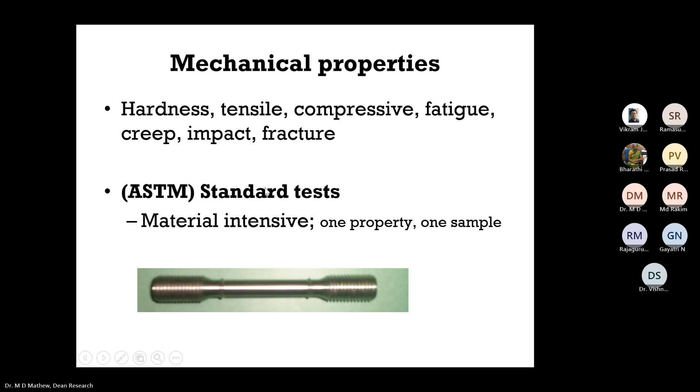But here I am going to discuss with you and share my knowledge on 3 innovative tests.

The special feature of this test is that these tests are material non-intensive. That means you don't need much material to do these tests. Or with a limited amount of material, you can generate a large amount of data.

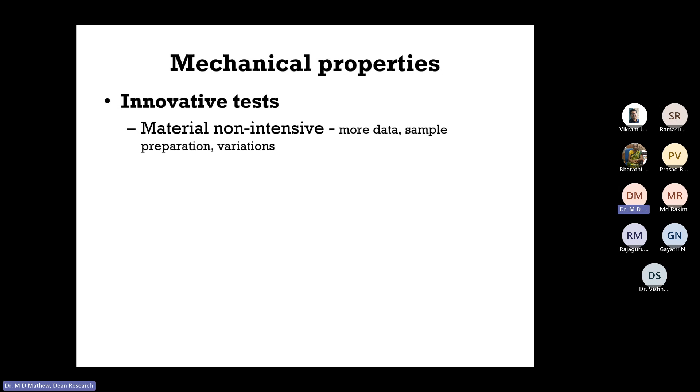Once you have only a limited amount of material, from one sample you can generate more data, as you will see going forward. That would mean a lot of sample preparation work can be avoided. Sample to sample variation in the data can be avoided. So there are many advantages for these innovative tests.

Which are these tests that I'm going to talk of? These are about ball indentation, from which you can evaluate the tensile properties, the fracture properties, and the hardness of the material. The other two are small punch creep and impression creep. As the names suggest, these are all about creep properties.

This becomes useful in the case of structural integrity evaluation, which means you can scoop a small portion of the material without compromising the integrity of the component. You can scoop out a small piece, and that can be used for these kinds of tests. And of course, the scooped portion, you can do some weld overlay and repair it.

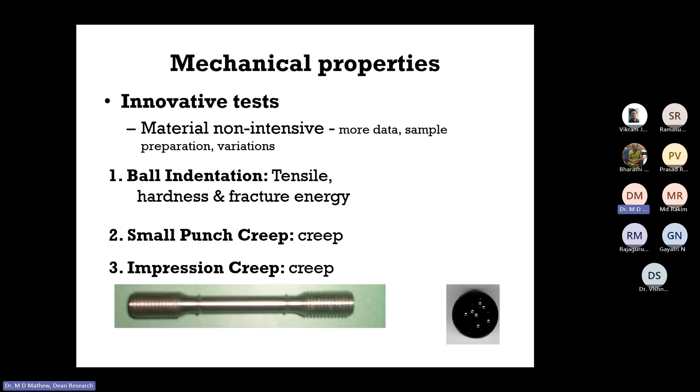The results that I'm going to present, as I mentioned, at IGCAR, there exists a state-of-the-art laboratory for carrying out evaluation of materials using these innovative methods of ball indentation, impression creep, and small punch creep.

I was fortunate to have been able to work with some of the pioneers in this field at North Carolina State University on ball indentation, at Kagoshima University on small punch creep, and also take inspiration from pioneers like JCM Li in impression creep, and late Professor D.H. Sastry from IISc also on impression creep.

So what are the advantages of these innovative tests? As I said, this is material non-intensive. You need only a small amount of material. See, in a conventional creep or tensile or fatigue test, you need a lot of material.

You take a small piece of plate itself and cut it into small mini strips, and then blocks or blanks, and then machine them into samples. Each may be 100 mm long or 10 mm diameter, etc. So that's really material intensive testing. On the other hand, these tests are material non-intensive, so you need really a small amount of material, and that is the big positive about these tests.

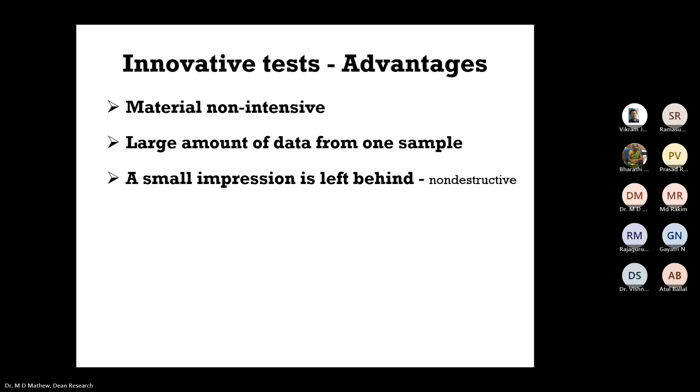So large amount of data from one sample. And these tests, except in one case, will leave only a small impression in the material. And that is why I call it non-destructive. It will leave only a small impression and maybe some compressive stress. So that qualifies it as a kind of non-destructive test.

Therefore, it becomes suitable for structural integrity assessment, assessing the remaining life of materials, and you can use it for materials development. Suppose you are developing a new alloy where you will be making a large number of laboratory heats with minor variations in composition, and you need to do a rapid screening. It comes very handy because these tests are short. You can do this test very quickly, so a large number of these heats can be characterized for screening purposes.

And another big advantage of these mechanisms or methods is that you can characterize the creep properties of different microstructural zones of weld joints. We all know that a weld joint's integrity is ultimately decided by the properties of either the weld metal, the base metal, or the heat affected zone, and the weld is always considered to be a weak link.

So it is difficult to determine the properties of each of these zones. Either you make a big weld pad and then prepare weld metal samples, or from the parent material you prepare base metal samples. But it is very difficult. Or you make a sample which will contain weld metal, heat affected zone, as well as base metal. But if you want to evaluate the properties of the heat affected zone itself, we know that in the case of alloys and steels, for example, the heat affected zone is very complex, with different kinds of microstructure in the heat affected zone itself, and each microstructure can have a different property.

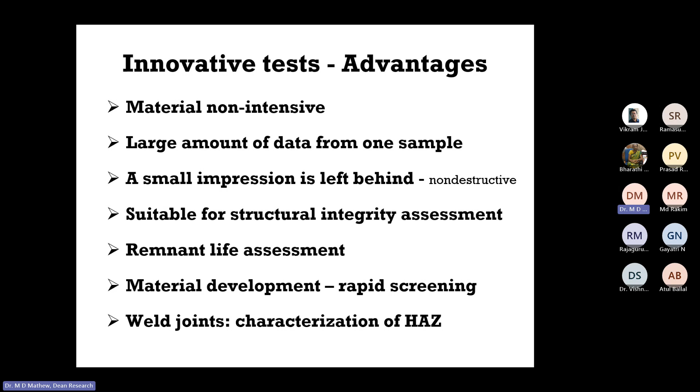If you want to characterize the properties of the heat affected zone, there is no other method, whereas this method allows you to do that. But it is not all rosy. There are many limitations. The first and foremost is about the mode of loading. Most mechanical tests we do are tensile tests, loading is tensile, but in these innovative tests, the loading turns out to be either compressive or bending mode.

Since these tests are all quick tests, testing time is short. But when it comes to alloys which can undergo microstructural changes over a period of time when exposed to high temperature, we'll be able to capture that effect in a standard test, where, for example, a creep test may go for hundreds and thousands of hours. Since these tests are short duration, we may not be able to capture the changes in the property of the material that occur as a result of microstructural changes.

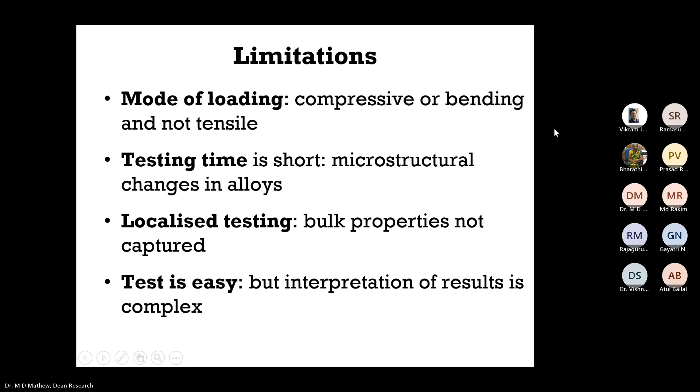It's a localized testing, so if you're looking at average bulk properties of the material, it is not represented. The test itself is not difficult, but interpretation of the result is pretty complex, and that is where still a lot of questions remain.

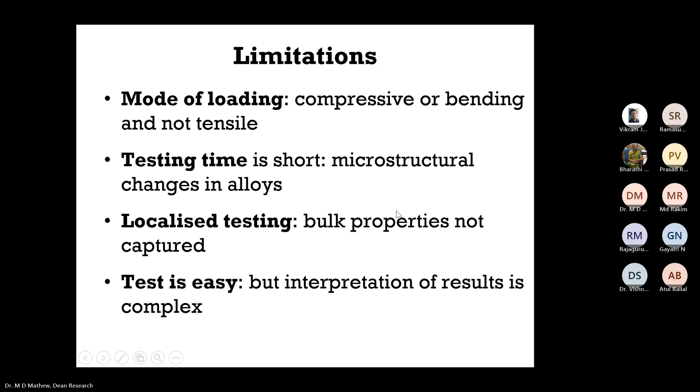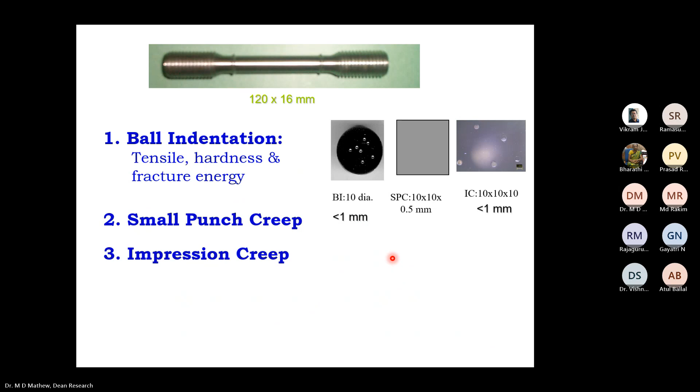Now coming to a little bit of detail about the ball indentation test. The test is basically a strain controlled multiple indentation. What you basically do is you have a tungsten carbide steel ball, and the ball is pushed into the material under strain control conditions. You don't push the ball in one step.

You do it in multiple steps, and in every step, you will initially define what is the total depth of penetration that you want to do. That is divided into some 6 or 7 equal amounts, and then in those steps you are penetrating the indenter into the material. Every time you are not penetrating the material fully inside, it's only partly inside, so there's a partial unloading that happens. So it is called a strain controlled multiple indentation test involving partial unloading.

As the indenter penetrates the material, you measure the load and also the depth of penetration, so you have two sets of data. Your raw data is the load as well as the depth of penetration. If you are doing 7 or 9 steps, you will generate a large amount of data continuously measuring load and depth of penetration from one experiment. Once you have this data, you can process it, apply elasticity and plasticity theories, along with certain semi-empirical relationships, and derive the tensile properties, hardness, as well as the fracture toughness of the material.

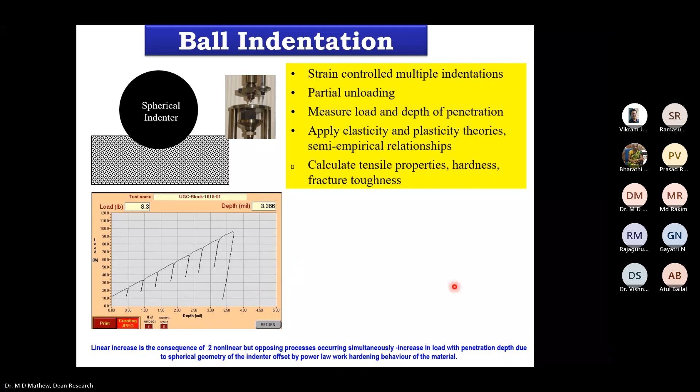So once you process the data, what do you get? You will get monotonic true stress, true strain curves. And the assumption is, in this case, that the true stress, true strain curve, which you have generated under compression mode, compression loading, is similar to the true stress, true strain curves in tension.

Another assumption in this processing of the data is that the indentation strain can be correlated with the strain in a uniaxial tensile test. And when you apply the ball, there is a pressure, and the mean ball pressure can be correlated with the stress in uniaxial tension.

And another important assumption is that the stress triaxiality and the deformation energy at the tip of the indenter is similar to what exists at the tip of a crack in a standard fracture mechanics test.

So you have here a ball, you are driving it into the material, you measure the depth of penetration, you measure the corresponding load, but this process is repeated multiple times, and you have the depth of penetration and load data. And from that, you are generating the stress strain curve.

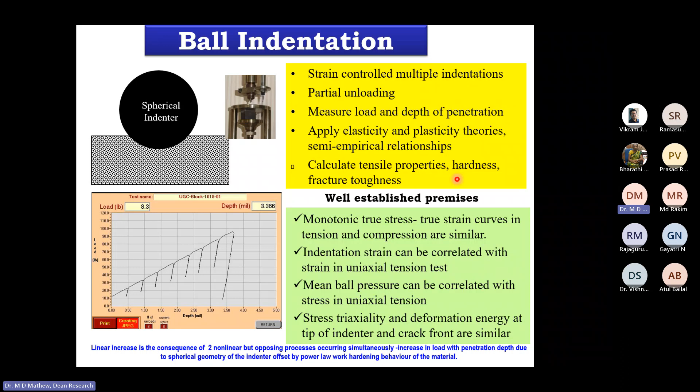Now, I should mention here that when a rigid spherical ball indenter is allowed to penetrate into a metal, then the material under the indenter will be in a triaxial state of stress. So the material immediately under the indenter will be subjected to both elastic and plastic deformation. So these stresses will force the material to deform elastically as well as plastically.

So this can result in an upward flow of the material, which we call pile-up of material, or it can also lead to downward flow of the material, which we call sink-in. And here there's a lot of scope for doing finite element analysis of the material behavior under the indenter in order to evaluate stress strain behavior, stress distribution, pile-up, sink-in calculations, etc., etc.

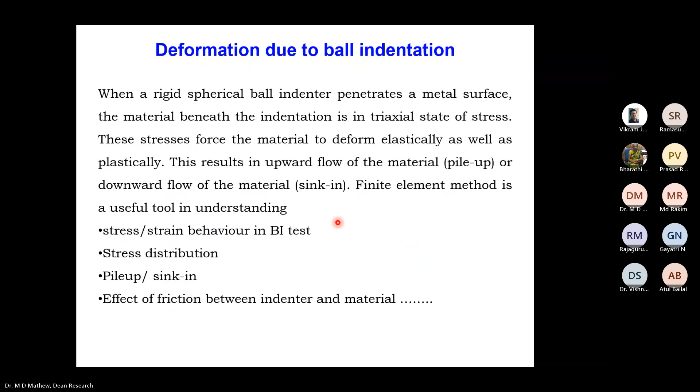And from that value, we can get a total diameter that will be consisting of elastic and plastic. So by applying certain Hertzian equations, we can convert this total diameter into plastic diameter. And once we have the plastic diameter value, then you can determine the epsilon P, the plastic strain in uniaxial tension, using this equation. Epsilon P is equal to 1/5 dP by capital D, where dP is the plastic diameter and capital D is the diameter of the indenter.

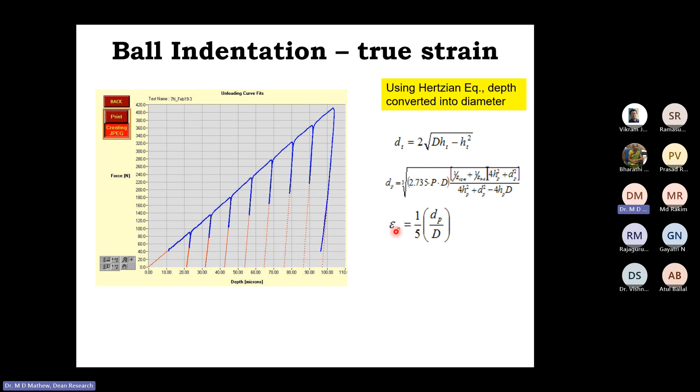So now you have got the true strain as you would derive from a tensile test. Now you need to get the true stress. So how do we get the true stress? So again, we have the load P, which is the load on the indenter. And then you can determine the mean ball pressure using an equation like this, 4P over pi dt squared.

And once you have the mean pressure, then you can evaluate the flow stress, uniaxial flow stress sigma, using this equation: sigma is equal to the mean ball pressure divided by a parameter delta. And the parameter delta is not having a fixed value. Its value will vary as the plastic zone size under the indenter evolves. So it's a bit of a complicated stuff. I'm not going into that.

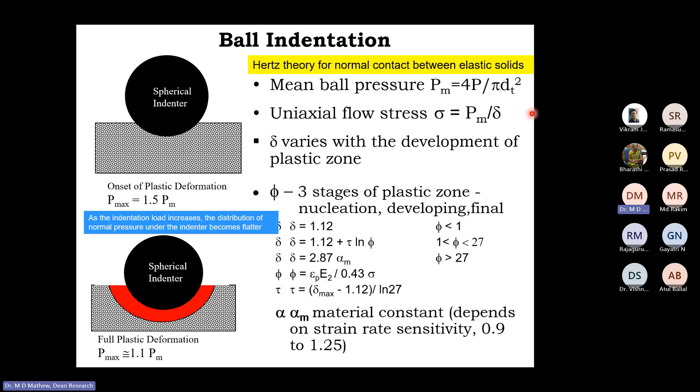So the point that you may notice is that we are now able to, from the load data, derive the uniaxial flow stress corresponding to each of the uniaxial flow strain values. So now that you have got the true stress and true strain values, you have many constitutive equations by which you can correlate the true stress, true strain values.

The Holloman equation is a very popular one. It says that the true stress sigma T is equal to a constant K into the true plastic strain to the power of N, which is the strain hardening exponent. So this is the curve that is generated, the true stress, true strain curve that is generated from the load versus depth data that we have seen earlier. So from that curve, now we are able to generate the true stress, true strain curve.

And by analyzing the true stress, true strain curve, we'll be able to get what is the UTS of the material through this relationship: UTS is equal to the strength coefficient K into epsilon U divided by E, whole to the power of N, where E is a constant for the material.

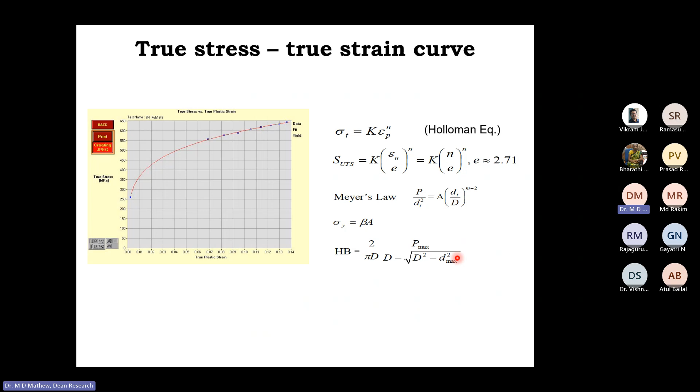Applying Meyer's law, you'll be able to determine the yield strength of the material using a relationship where yield strength is equal to beta into A. Again, the hardness can also be derived through an equation like this. I'm not going into the derivation of these equations, but from the load and depth combination data, we are able to get true stress, true strain data. From that, you can determine the yield stress, ultimate tensile strength, and hardness of the material.

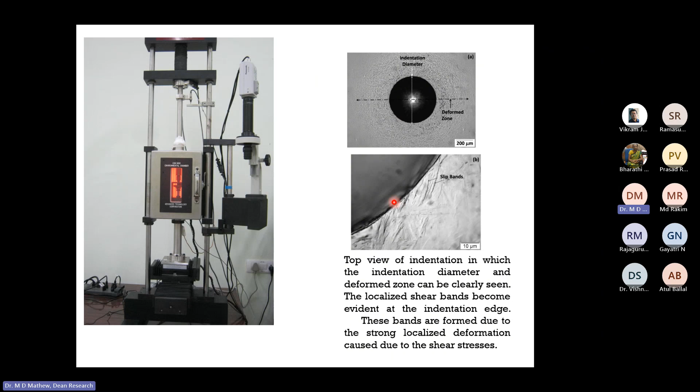So at IGCAR, as Dr. Reddy knows very well, we had a big research program on developing low carbon nitrogen alloy 316 stainless steel for certain important applications in fast reactors.

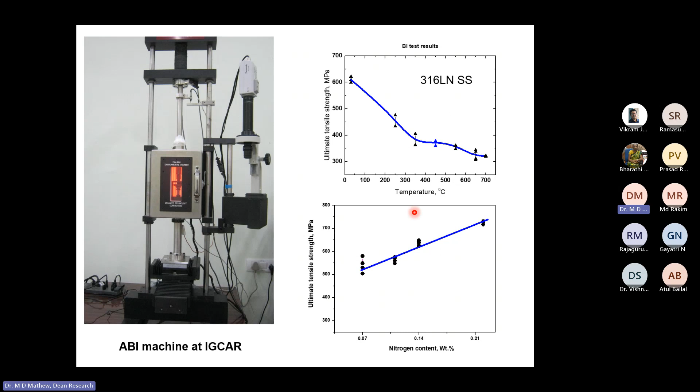Another advantage of this ball indentation test is that you can make an estimate of the fracture energy of the material without carrying out the conventional or standard CT tests. But here again, there are a few important assumptions. First is that the indentation generates a deformation field that is concentrated around the area of contact of the indenter with the sample.

The deforming volume of material is small, but it is surrounded by a large volume of non-deforming material. So as the indenter penetrates, the material immediately under the indenter undergoes deformation, elastic and plastic, but it is constrained by a larger volume of material which is not deforming. So a degree of constraint is exercised on the deforming material by the surrounding material.

This constraint is considered similar to the degree of constraint that exists at the crack tip. For a crack to progress, it depends on the kind of triaxiality at the crack tip as well as the kind of constraint it faces for propagation. So a kind of equivalence is conceived here - it is assumed that the stress triaxialities at the center of the contact area between the indenter and the material are similar to those at the crack tip. This has been proved by other researchers through finite element analysis.

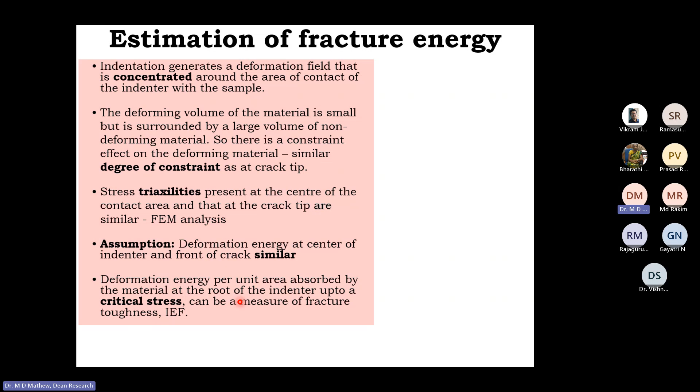So it is assumed that deformation energy at the center of the indenter and at the front of a crack are similar. If that is so, then the deformation energy per unit area absorbed by the material at the root of the ball indenter up to a critical stress can be a measure of fracture toughness of the material. That is called indentation energy to fracture, meaning if I were to continuously allow the indenter to penetrate the material to a depth that generates a stress equal to the fracture stress of the material, then the energy absorbed in that process can be correlated with the energy for fracture.

Fracture is assumed to occur when the maximum load equals the cleavage fracture stress. That means I'm allowing the indenter to keep penetrating under increasing load to a point where the equivalent stress becomes the fracture stress. Then I calculate the energy absorbed by the material under the indenter, given by this equation. That is the indentation energy to fracture.

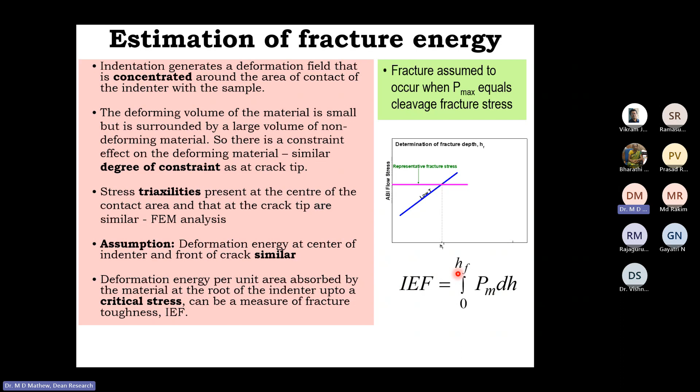The indentation energy to fracture can be correlated with, for example, the Charpy energy.

A lot of experiments were done on CF8. CF8 is a cast version of 304 stainless steel. Ball indentation tests were done from minus 150 degrees centigrade to plus 150 degrees centigrade on this material, and the indentation energy to fracture described earlier was evaluated.

This shows how IEF changes as a function of temperature. You find that as the temperature comes down, there's a kind of constant value. At higher temperature, IEF values tend to be constant, but as you decrease the temperature, it continuously decreases, and again it tends to reach a constant value at temperatures less than minus 100 degrees centigrade. So you would imagine this is a kind of ductile to brittle transition curve that you will generate in a conventional impact test.

And this curve represents the data obtained from standard impact tests, CVIT, using Charpy specimens, by carrying out tests roughly in the same temperature range. So you find that the shape of the curve is similar.

Yes, the values are not comparable. For example, here we have values in the order of 1000, 2000, etc., whereas here we have values in the tens. So values are not comparable, but the shape is comparable, which would mean even the DBTT temperature can be determined from this graph. So just by doing ball indentation tests on one sample of material, you will be able to get an estimate of the ductile to brittle transition temperature.

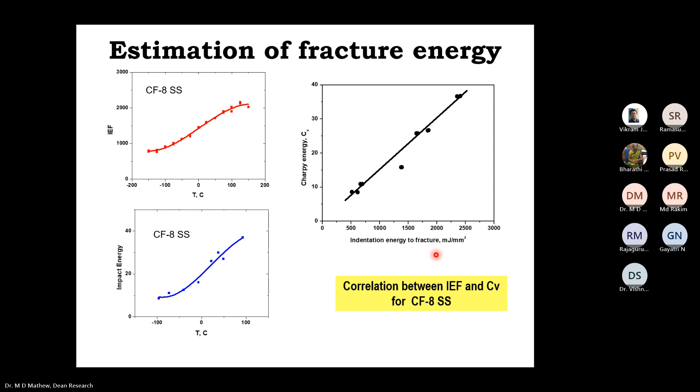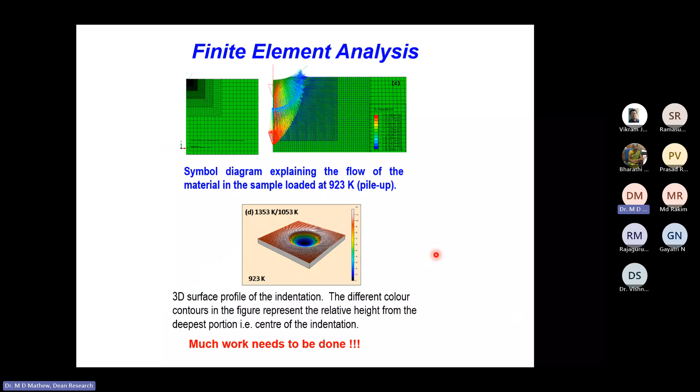We have done a lot of finite element analysis at IGCAR to support the assumptions that I have described earlier. Again, let me skip that.

So to summarize, ball indentation test is a very useful test in order to evaluate the tensile properties of the material, fracture energy, and the hardness of the material.

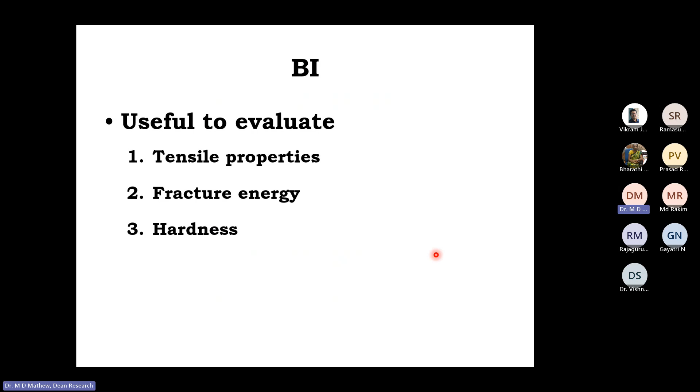Now I will come to impression creep. As the term itself tells us, the creep deformation is determined under compression loading. So what we do here is, at a constant load - creep means the deformation that happens at a constant load and constant temperature.

The deformation as a function of time is the creep curve. So in impression creep, again, the load is constant, temperature is constant, and under the action of this constant load, a flat-ended cylindrical indenter, typically about 1 millimeter diameter, is pushed into the material. When the material is pushed, the depth of penetration is measured as a function of time.

So although the temperature is constant and the load is constant, this indenter will continue to penetrate deeper and deeper into the material. And as it penetrates deeper, you measure the depth of penetration at fixed intervals of time.

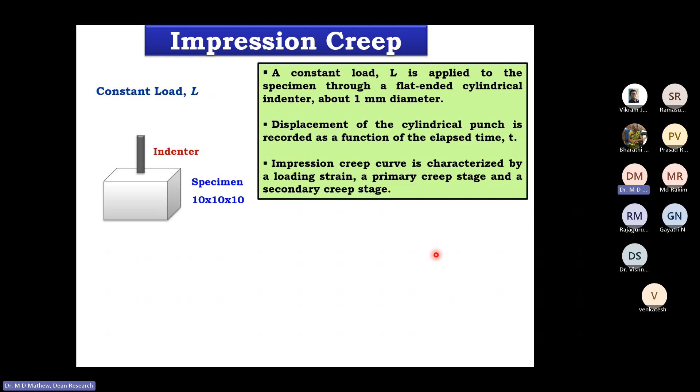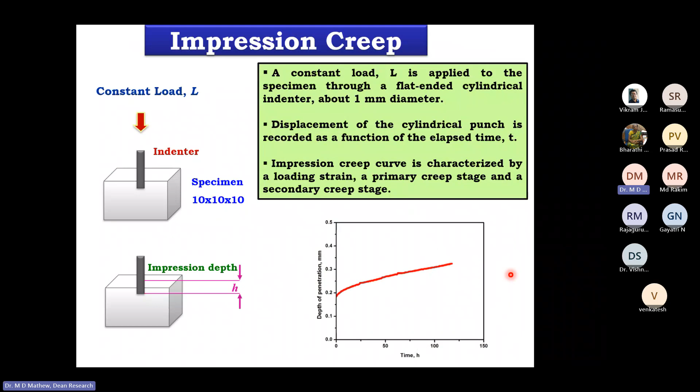So how do you analyze this creep curve and then generate important information that we need, which we would have got otherwise from a standard creep test? In this case, we have the load L.

First, you calculate the mean pressure under the punch. So you have a cylindrical punch of diameter small d, and you are applying a load, capital L. Under action of the load, you can calculate the mean pressure under the cylindrical punch: sigma m is equal to 4L divided by pi d squared, where L is the applied load, small d is the diameter of the cylindrical indenter, and sigma m is the mean pressure.

Now you can also determine the velocity of penetration, which is nothing but dH by dt. We have the depth of penetration data as a function of time, so dH by dt gives you the impression velocity. So now you have the mean pressure as well as the impression velocity.

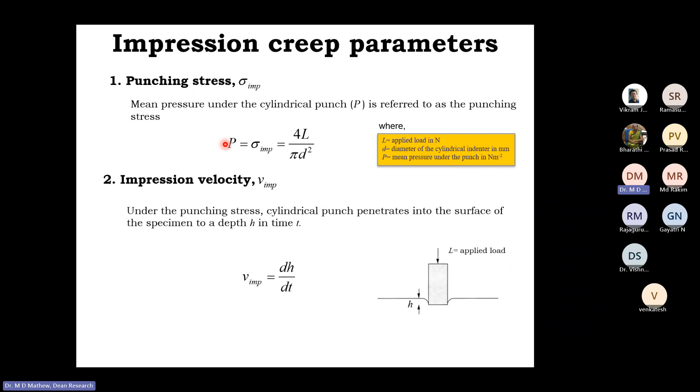Now, how do we convert it into strain and stress? The impression velocity can be related to the uniaxial stress sigma using a relationship: sigma uniaxial equals a constant alpha multiplied by the impression mean stress, sigma IMP. So sigma IMP, which we calculated as 4L by pi d squared, multiplied by alpha, gives you the equivalent uniaxial stress.

It turns out that alpha is around 0.3 for a large number of materials - alloys and metals, quite a bit of them - the value of alpha is about 0.3. It's a constant. You ask me why it is a constant, I have no idea, but that is the empirical evidence. So you have got the uniaxial stress.

Then you have the velocity of penetration - how can we convert it to the creep rate, strain rate? The strain rate is given by the impression velocity divided by beta into d, where beta is a constant and d is the diameter of the indenter. It turns out that beta is equal to 1 for a large number of materials.

So we have two constants: alpha, to convert the mean pressure into uniaxial stress, and beta, to convert the impression velocity to strain rate under uniaxial tension. So now we have both sigma and epsilon dot, and we can correlate stress and strain rate to generate other important relationships like Norton's law. This is how impression creep data is converted to equivalent strain rate and stress data.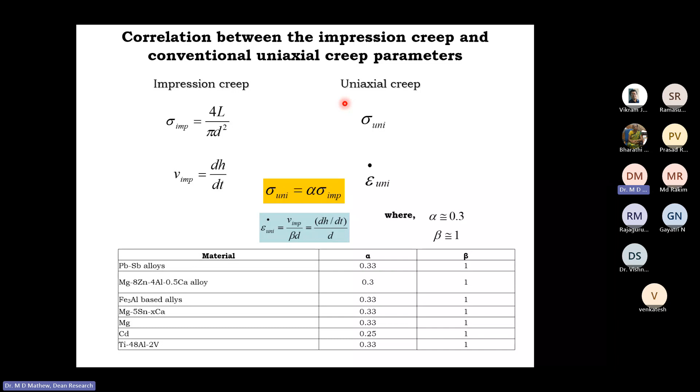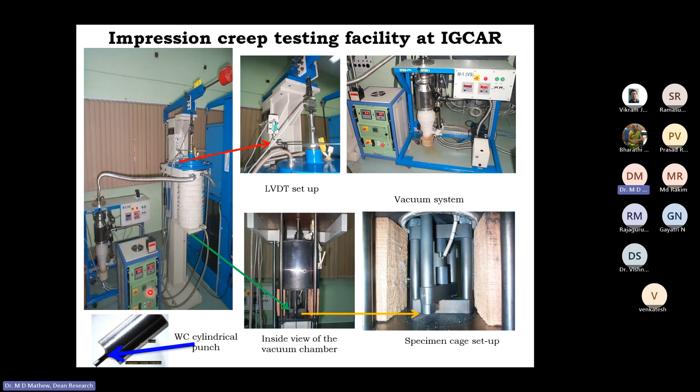This shows the experimental setup. It is not necessary to go into detail - this is the furnace, the sample is inside, and it is under vacuum. You have the loading mechanism, strain measuring, and depth of penetration mechanisms, etc.

This graph gives you the results of impression creep tests on 316LN stainless steel at 923 Kelvin at four different loads 472 to 760 megapascal. You see typical creep curves at all the stresses, and as expected, as you increase the stress, the creep curve moves up when you plot depth of penetration versus time.

The creep curves are characterized by a loading strain, a primary creep stage, and a secondary creep stage. As I mentioned, there will be no tertiary creep stage in impression creep because there is no necking and no fracture. With increasing load, the depth of penetration increases.

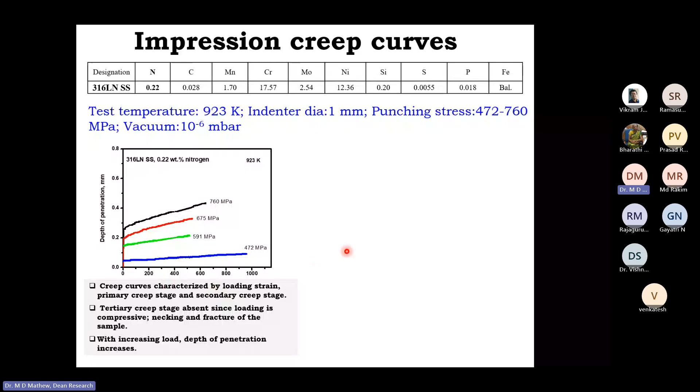From these creep curves, which plot depth of penetration versus time, you can generate the rate of penetration as a function of time. You find that the rate is very high initially and then becomes steady - this is the steady state deformation. So you get a very well-defined steady state in the impression creep test.

What you see here are the impressions left behind at the end of the impression creep test. One 10 by 10 by 10 sample block was used for carrying out, in this case, 5 impression creep tests.

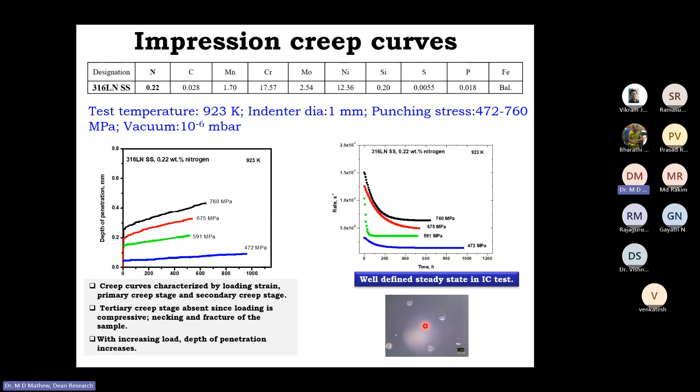This shows the correlation between steady state impression velocity and punching stress. On a log-log plot, you find a linear relationship, similar to the Norton law. The slope equals 7.7, which is the so-called stress exponent, and that is the number expected from standard uniaxial creep tests, a value of n in this range at this temperature.

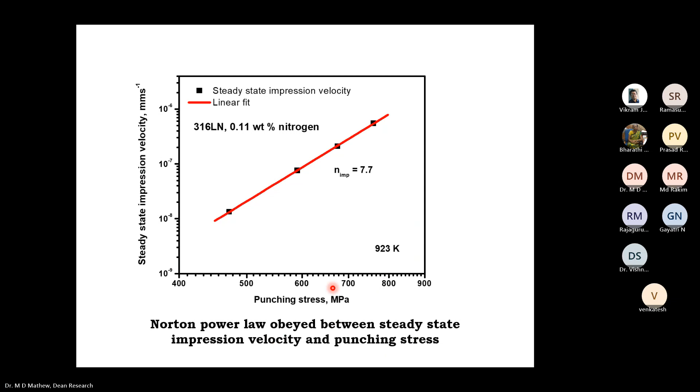So the Norton power law is obeyed between steady state impression velocity and the punching stress. The next question is how do we correlate the impression creep data with data from standard conventional creep tests. I already explained the conversion of mean pressure to uniaxial stress and impression velocity to strain rate, with constants alpha and beta.

So this is the correlation, a log-log plot of steady state creep rate versus stress. The red square data points represent the uniaxial creep test from standard test, and the circles represent the impression creep test. You find there's a very good correlation and the slope is the same.

So now you find you are able to convert the impression creep test data into the data you would have otherwise obtained from a standard creep test. But one thing missing in an impression creep test is you don't have any idea about the fracture life of the material, which is a very important property in creep test. So how do we do that?

There are certain methods. One is using the very well-known Monkman-Grant relationship, a very well-established relationship between steady state creep rate and rupture life for a large number of materials. So once you have the steady state creep data, using the Monkman-Grant relationship, you can derive the rupture life data.

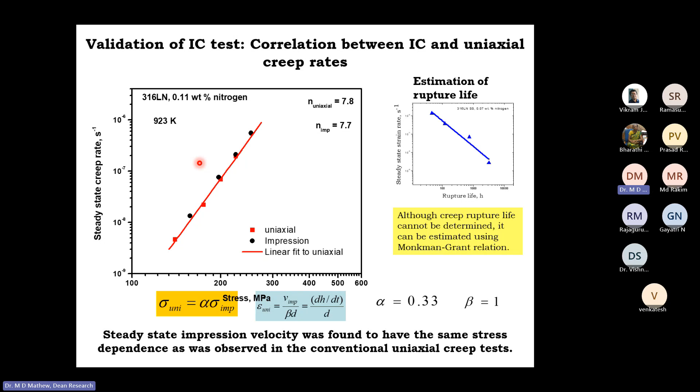So although impression creep test does not lead to rupture, you are able to generate the rupture data.

This shows some of the finite element analysis carried out. This is an EBSD micrograph. You can see here that there are 3 layers of deformation. Region 1 is where the grains appear somewhat equiaxed, which would lead us to assume that the material in this region is under hydrostatic stress. That is what you see here.

Then a region 2, where you find the grains are all deformed, subjected to shear stress, so there's a lot of shear deformation happening in this region. Here you have equiaxed grains, under that the elongated sheared grains, and then the material under that is again equiaxed with no plastic deformation.

So if we look at the material under the indenter in an impression creep test, you will find these three different patterns describing the kind of deformation that has happened.

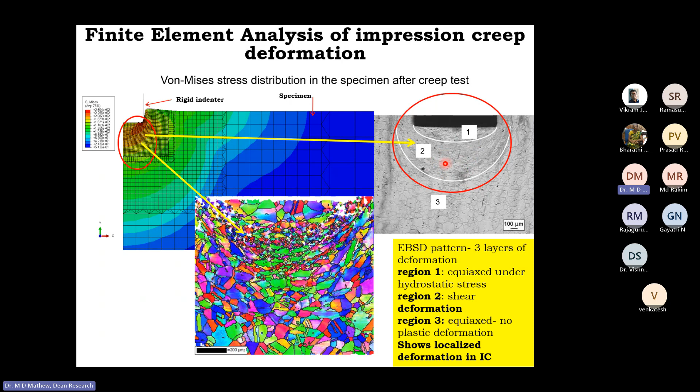And another thing, of course, there will be the pileup of material, etc. Because as the indenter goes inside the material, it has to be accommodated either by the material surrounding the indenter, or some of it will be thrown out in the form of a pileup. You can always measure that using a surface profilometer and then derive a lot of information from that, both as a function of time as well as stress.

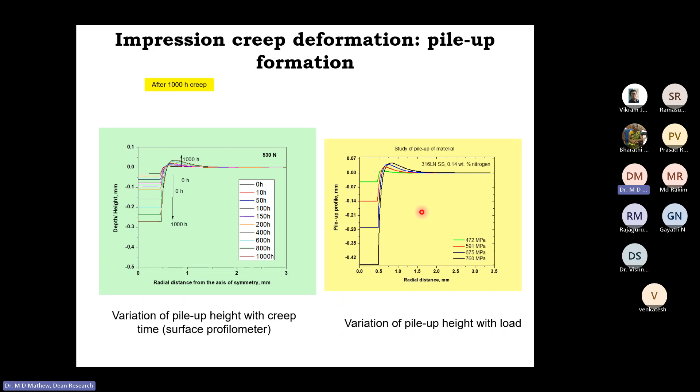Coming back to our alloy development program, creep tests are always very long. In fact, IGCAR has the record of having conducted the longest creep test, 150,000 hours, close to 20 years, one creep test was continued before it fractured.

So we cannot do that kind of creep test for materials alloy development program. We were trying to optimize the amount of nitrogen as far as the creep and fatigue properties were concerned, by preparing a number of heats, laboratory heats with various amounts of nitrogen.

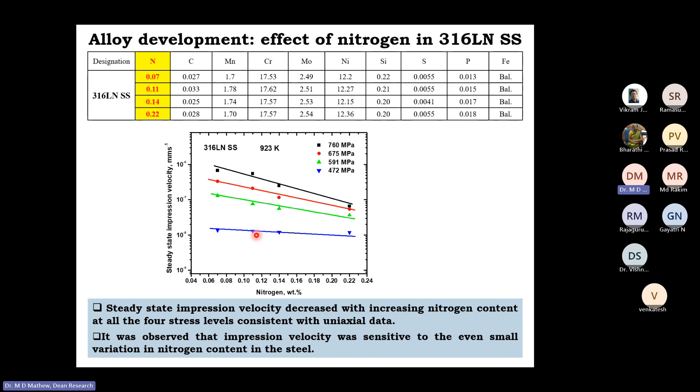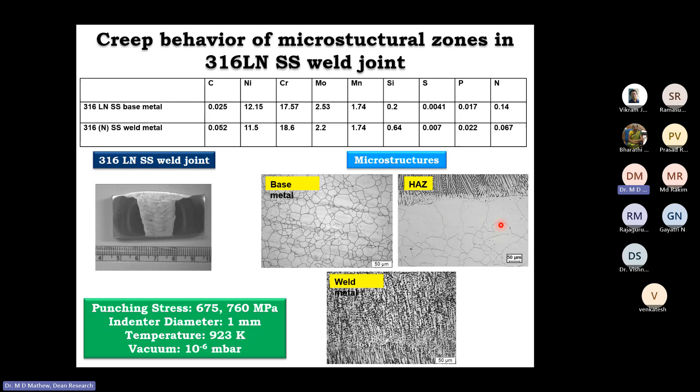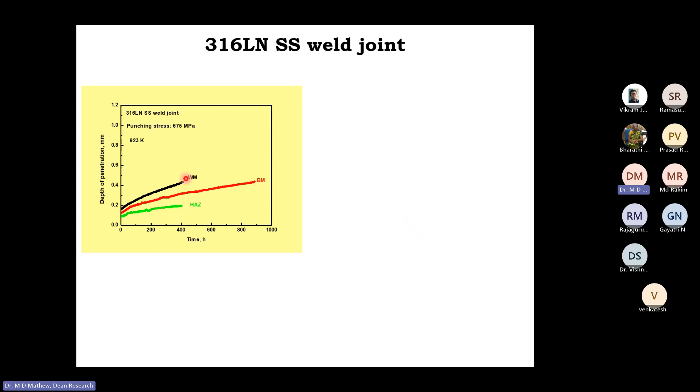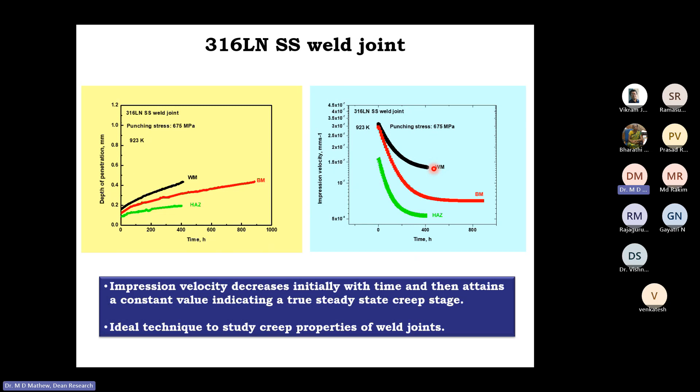Now I move on to the third one. I know I am running out of time. That is small punch creep.

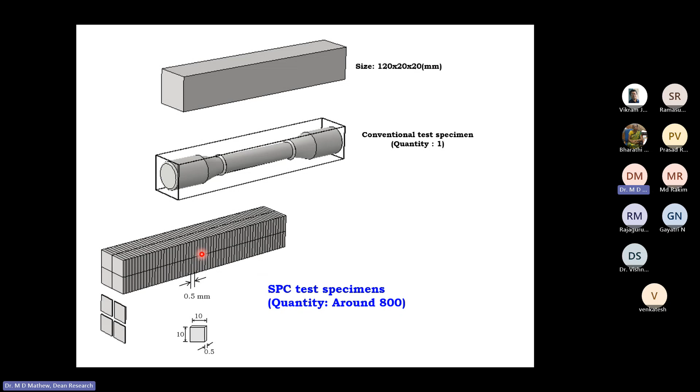This is a block of 120 by 20 by 20. Out of that, I can prepare one conventional creep test specimen meeting ASTM standard. But when I am talking of small punch creep test, I'll be able to generate 800 samples from this single block, because the size of a small punch creep specimen is only 10 by 10, which is the same as this cross section of 20 by 20. I need only 10 by 10, and the thickness of the specimen is just 0.5 mm. So just one block of specimen of 120 by 20 by 20 can generate 800 small punch creep samples. So that is why I say it is material non-intensive.

And you load the specimen, this 10 by 10 by 0.5 mm square specimen, using this indenter. So the spherical ball is loaded, the ball touches the sample, and once the ball is loaded, the specimen undergoes creep deformation. The specimen is loaded by the ball at a constant load, and of course it is creep, so temperature is high. The test continues till the sample breaks, the material rupture.

So obviously here it is not compression mode of deformation, but what happens to the sample is it undergoes bending deflection. So instead of measuring depth of penetration as in the case of impression creep, in the case of small punch creep, you are going to measure the bending deflection as a function of time.

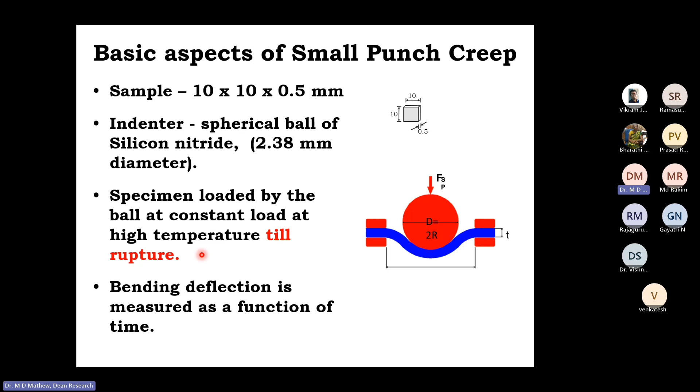So this is the sample, this is your ball, the ceramic ball, and you have the ram here. With the ram, you are loading the ball, and once the ball is loaded, it is loading the sample also. So a constant load L is applied to the specimen through the spherical ball, and the bending displacement that occurs is recorded as a function of time. Once you have the time data and the deflection data, you can make a plot of deflection versus time, and that is what is called the small punch creep curve.

And the small punch creep curve, though it is a measure of deflection versus time, will have the imprints of primary creep, secondary creep, and tertiary creep, just as you get it in a standard creep test.

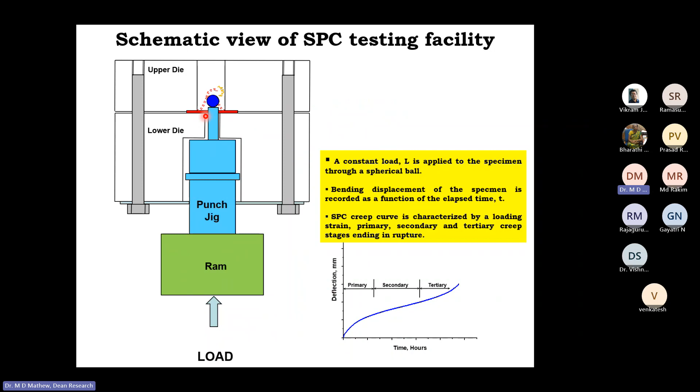So in the case of small punch creep, it is bending that is happening. There is both elastic bending and plastic bending and membrane stretching. So when the punch initially contacts the disc specimen, what happens is elastic bending. Slowly the yielding happens in the highest stressed region, that is the region at the root of the spherical ball. That leads to plastic bending, and the plastic bending region expands. So the yield front expands through the thickness of the specimen and radially outwards.

And the next stage is membrane stretching, that is when the yield front extends beyond the region of contact between the punch and the disc. And that region will be under a biaxial stress state. So this process continues with time, and finally there will be necking, and necking will result in failure.

So when this bending happens in the bending region, there will be a rapid increase in the contact area with an increase in the central deflection. The contact area is controlled by the bending deformation. But in the case of membrane stretching, it should be noted that the contact area is controlled by the reduction in thickness.

This is the small punch creep machine. Again, let me not go through it. All the three machines that I have shown you are taken from IGCAR. These systems have been there for many years, and they have produced a lot of valuable data.

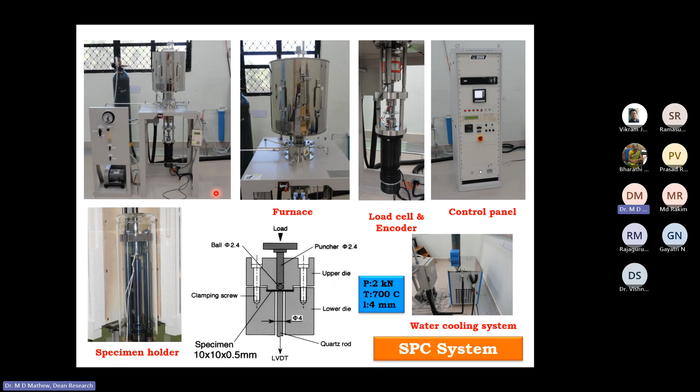So this is a typical SPC curve, deflection versus time. The test has gone close to 1000 hours. You have the typical shape, with the loading strain in the primary, secondary, and tertiary regions leading to rupture, and you get the deflection rate versus time curve as expected.

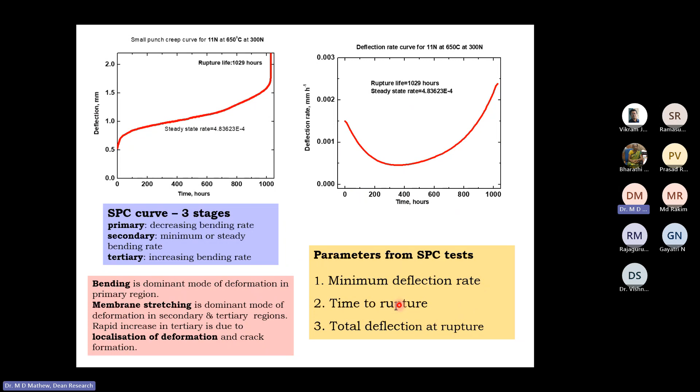As I mentioned, bending is the dominant mode of deformation in the primary region. Membrane stretching is the dominant deformation mode in the secondary and tertiary regions, and there's a rapid increase in the tertiary region due to localization of deformation and crack formation, leading to fracture. So from a small punch creep test, you are able to determine the deflection rate and also the minimum deflection rate. You can determine the rupture time and the total deflection at rupture.

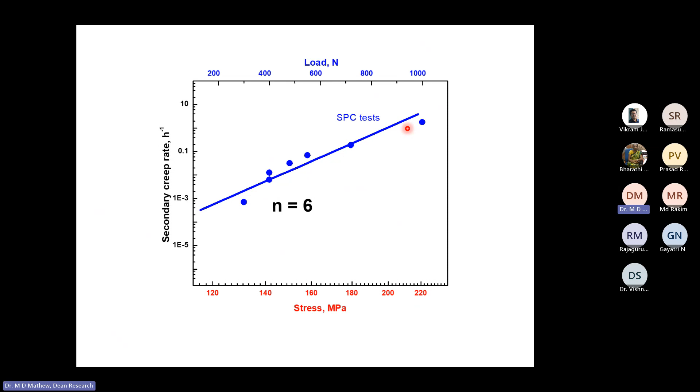So if you plot the deflection rate as a function of stress, you find that on a log-log plot you get this standard straight line curve, which is the expression of Norton's creep law with a slope of 6. So this is the data generated from the SPC curve -- all the data at different stresses, with the minimum creep rates or minimum deflection rates plotted as a function of stress, gives a linear relationship, meaning it obeys a Norton power law.

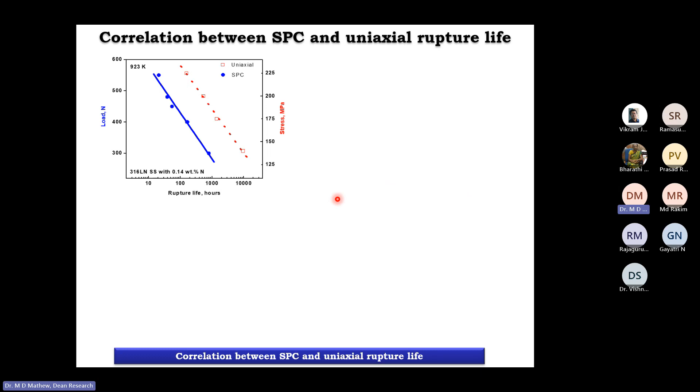Now, how do we correlate the small punch creep data with conventional creep data? This graph shows the data from the uniaxial test, stress versus rupture life, and this is the data from the bending test, again rupture life versus load for SPC and stress versus life for the uniaxial data. Now we have to find some correlation between uniaxial stress and the SPC load.

So this is the kind of relationship that has been generated between F, the SPC load, and sigma, the uniaxial stress. F by sigma is equal to K into R into T squared by H into D. So capital F is the SPC creep load, and sigma is the uniaxial stress, found to be equal to some constant K into capital R, the radius of the punch indenter, into T, the thickness of the specimen, then H, the radius of the receiving hole of the indenter fixture, and capital D, the ductility factor for the material.

So it's a complex relationship, but it's like an empirical relationship, and this has been found to be useful for correlating the SPC data with uniaxial rupture data.

So once you use this equation conversion relationship and convert the data, you will get an excellent correlation between SPC test and uniaxial creep test in terms of the rupture life of the material. Again, this F by sigma turns out to be about 1.75 for most materials.

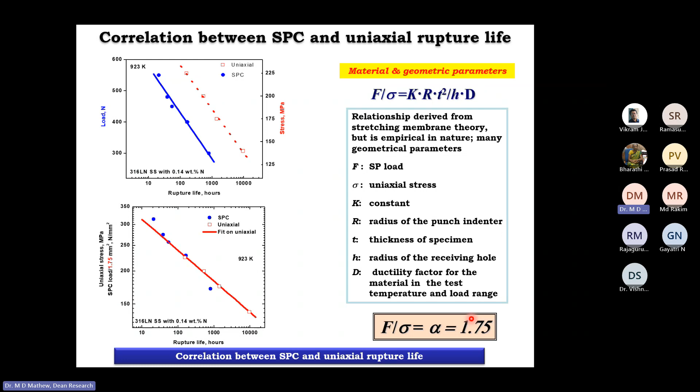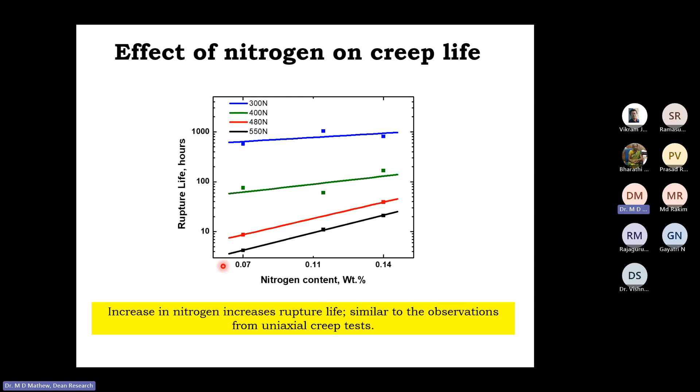So from SPC creep test, we have determined the rupture life and how with different nitrogen contents, the rupture life varied. As you increase the nitrogen content, rupture life increases, just as the observations obtained from uniaxial creep test. So we have been able to obtain excellent correlation between the results from these innovative tests versus the data obtained from conventional tests, but it involves a lot of assumptions as well as empirical relationships.

So to summarize, ball indentation creep and small punch creep are innovative testing techniques suitable for evaluation of tensile, fracture, and creep properties of materials. A large amount of data can be collected from one sample, which not only reduces the effort for sample preparation, but also reduces the sample-to-sample variation in properties.

So it's a very useful tool for assessment of structural integrity of materials, because you want to assess the properties without compromising the structural integrity of a component or equipment. So it has to be material non-intensive. You cannot remove large parts of the component to do the evaluation. From that point of view, it's considered material non-intensive and suitable for assessment of structural integrity.

It's very useful for alloy development programs, as I have demonstrated that rapid screening of mechanical properties of multiple laboratory heats for optimizing composition can be carried out in short time. And weld joints can be characterized - different microstructural zones in the weld joint properties can be characterized.

And it is nearly non-destructive. You will find the ball indentation leaves a small spherical indentation. Likewise in small punch creep, and in impression creep also. But the small punch creep, of course, is destructive because the sample breaks. But you don't need a lot of material to do this test, so to that extent, you can say the structure is kept intact.

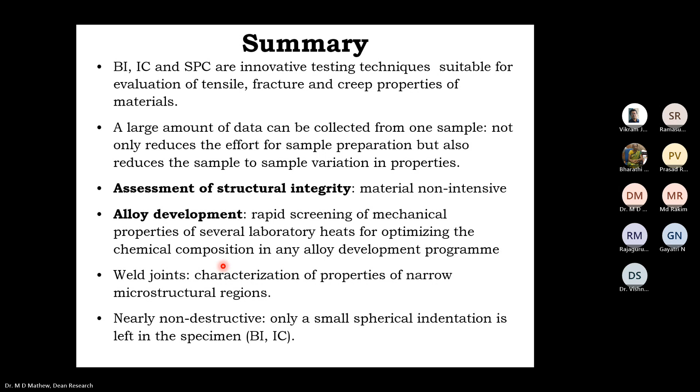I must also point out the limitations which I have been listing out one after another during this presentation. One is that since the test time is generally short, often much less than 1000 hours, the creep behavior due to long-term microstructural changes cannot be captured. Secondly, rupture life cannot be determined by the impression creep technique because there is no fracture occurring.

The type of loading is compressive in ball indentation and impression creep, and predominantly bending in the case of small punch creep, unlike conventional creep tests or conventional tensile tests which are carried out under tensile loading conditions. Again, it is not monotonic loading, uniaxial loading - here it is complex and multi-axial.

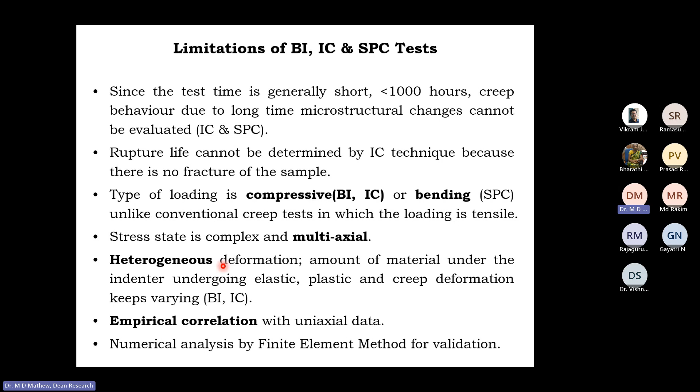And the kind of deformation that the material undergoes is heterogeneous, because the amount of material under the indenter is undergoing elastic, plastic, and creep deformation and is subjected to a lot of constraints. These methods have to use a lot of empirical correlations to generate equivalent data under uniaxial conditions. But most of them have been validated through finite element analysis, though a lot of work remains to be done.

So to end, I would like to thank my IGCAR colleagues, where most of these experiments were carried out and where we have been able to establish these state-of-the-art facilities. And I'm glad to hear from Dr. Varaprasad Reddy that these machines are still generating tons of data, very valuable information.

I should also thank my mentors, Professor K.L. Murty at North Carolina State University, from whom I learned a lot about ball indentation, Professor Komazaki of Kagoshima University in Japan, from whom I learned about small punch creep, and my interactions with Dr. J.C.M. Li and Professor D.H. Sastry on impression creep. So that brings me to the end of my presentation. Thank you all for your kind attention.

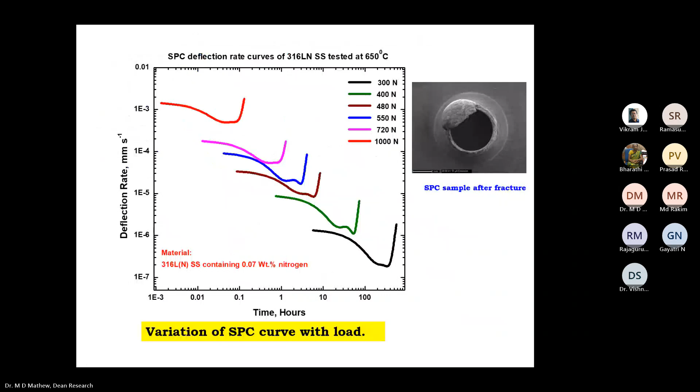Yeah, actually there is membrane stretching happening under the ball till fracture.

So when there is stretching, the thickness of that sheet is under a biaxial tension state, is it? Yes, because in bending you'll have opposite stresses, compression and tension. You are right, it will be under a biaxial stress state. I see, thank you.

In a standard conventional creep test, you have a big volume of material, monotonic loading, uniaxial, and the entire material sees the same stress, deforming uniformly till it enters the tertiary stage. But in all these tests I've described, it's quite complex and keeps changing as the test progresses. The beauty is, at the end of it, you are able to correlate the data with conventional tests, with a lot of magic.

Thank you. I think Sundar sir has a question. Sir? Yes, please.

Dr. Mathew, you said that you are in administration right now, so I have a question of administrative nature.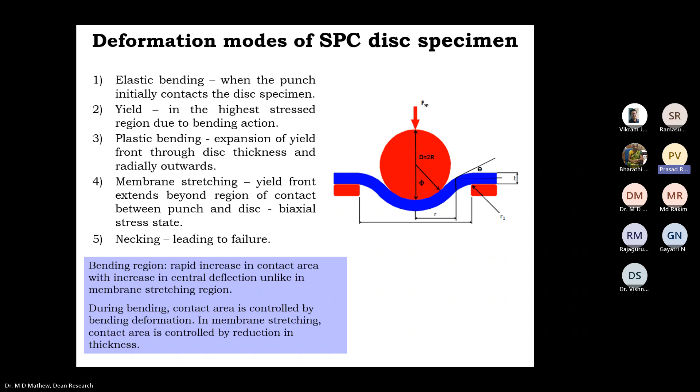Prasad Reddy: Yes sir, Dr. Mathew, just one small guidance we need. For example, suppose if we have an unknown material for which we don't have these correlation coefficients, how should we proceed? Of course we have to do a uniaxial test and then correlate, but there are some standard constants, like machine-dependent constants or others, whether that needs to be generated in some other way.

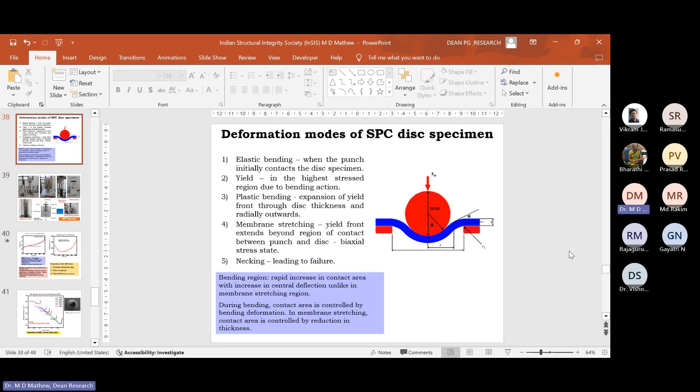In the case of the ball indentation test, both alpha and beta are roughly the same for all kinds of materials, so there you have no issue for unknown material. You can use the same numbers, because for a lot of materials it has been shown that the number is the same.

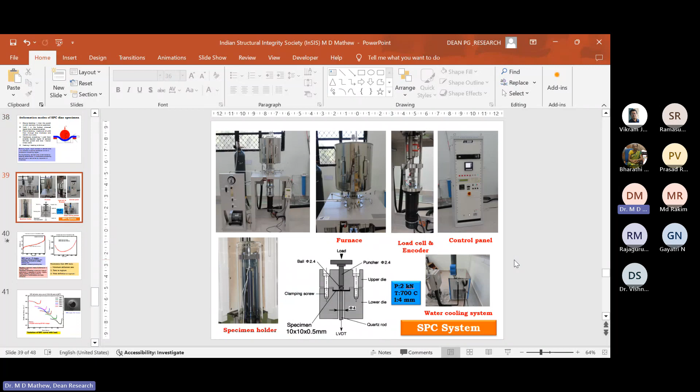Yes sir. In the case of small punch creep, again you have a value which is roughly 1.75, that is the ratio of the load to uniaxial stress in that range. But you will have to generate, at least do a few experiments to generate this number, and then of course you can use it.

Okay, so when we extract this data from the machine, will there sometimes be machine dependent constants that come into picture? No, the machine dependency is not there. What are the experimental variables? It is only load, or the stress.

And temperature, which are the same whether you are doing it in uniaxial or in these kinds of tests. So I don't think so, but as I said, all these are constants - magic numbers - and we have to really make better sense of those things by doing more work. I believe a lot of FEM analysis can be done, and one can get really deep insights into what is happening under the ball in ball indentation, or under the indentation in an impression creep, or how the bending - the conflict between elastic, plastic and membrane stretching - is happening in a small punch creep. A lot of things can be done and analyzed.

Okay, but despite this weakness of having all this empirical correlation, it works, it has been found to work fairly well. Okay, thank you sir. Most welcome.